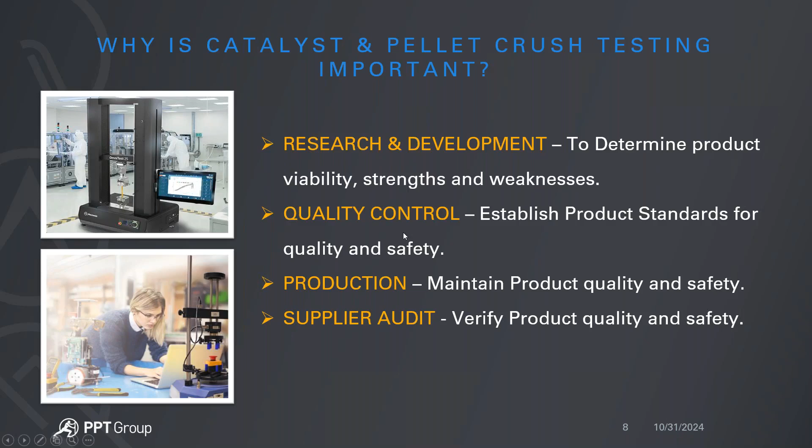All right, so why is catalyst and pellet crush testing important? As with most physical properties testing, for research and development to determine product viability, strengths and weaknesses; for quality control, to establish product standards for quality and safety; for production, maintaining product quality and safety. And then in cases where you're supplied goods and you need to check those goods against supplied values, the testing is used to verify the aforementioned product quality and safety. So these are some of the ways that the testing is used.

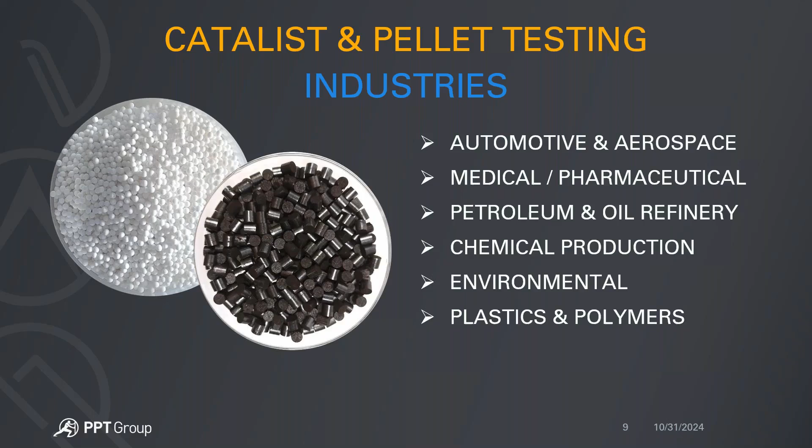There's several different industries that use catalyst and pellet testing: automotive and aerospace, medical and pharmaceutical, petroleum and oil refinery, chemical production, environmental, as well as plastics and polymers. So what is the actual test, what does it involve, and why is it even done to begin with?

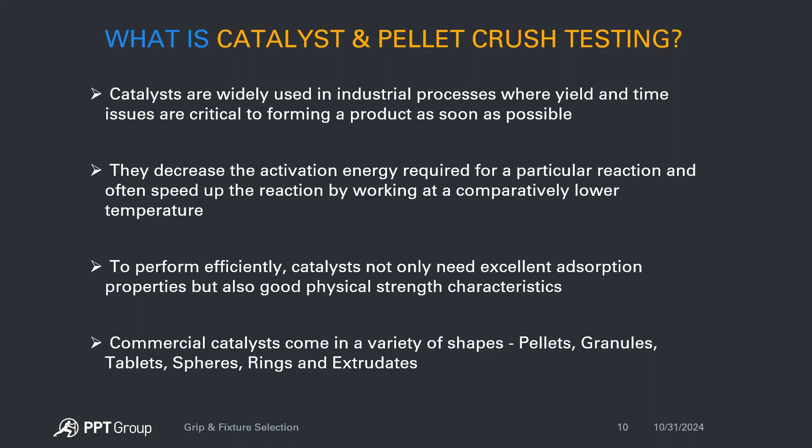Now, catalysts are widely used in industrial processes where yield and time issues are critical to forming a product as soon as possible. They usually decrease the activation energy required for a particular reaction and often speed up the reaction by working at a comparatively lower temperature. And also, to perform efficiently, catalysts not only need to have excellent adsorption properties, but also good physical strength and characteristics. You'll find certain commercial catalysts come in different forms, sizes, and shapes. They'll be either round or cylindrical: pellets, granules, tablets, spheres, rings, and other extrudates.

There are also mechanical failure properties that will cause small fragments and fine particles forming, which essentially creates blockages in fluid flow, especially in the oil and gas, oil refinery and petroleum industries. And this is unacceptable, which essentially will cause pressure to drop across the reactor and create other variations in heat transfer. Again, determining the mechanical strength of solid catalysts is therefore key. It's critical for ensuring a reliable and efficient reaction process.

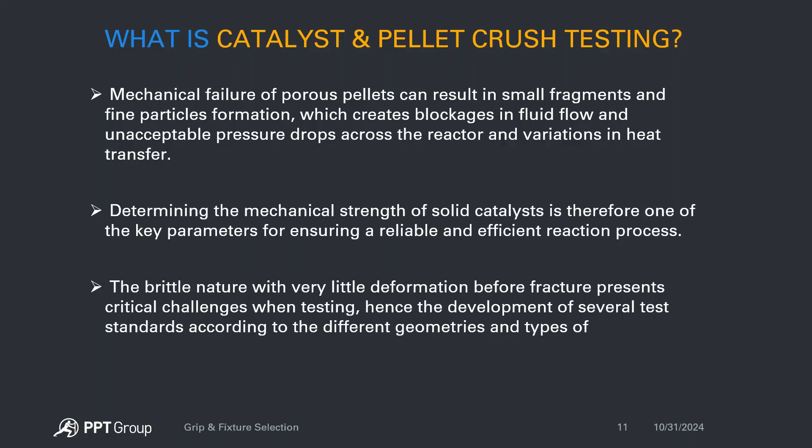Now, because of the brittle nature and the minimal deformation characteristics of most catalysts and pellets, this presents a kind of a critical challenge when testing. For that reason, several different test standards have been developed depending on the type of catalyst or pellet that's being tested to capture, especially, the points of deformation or the point of fracture. That way, whether in research and development or in production environments, we have enough information to go on to make sure that the processes are safe and also that we're meeting our own safety and quality standards.

Now, the primary test applications are, again, single sample testing that you'll find in ASTM D4179. This is where you're testing just a single pellet. And these are usually compressed until fracture or break, either side loading or top loading, depending on what the particular sample or product requires. Again, most testing applications for single pellet testing or catalyst testing will involve running the test at a constant rate, compressing until the sample fails or fractures, and then calculating the break force and the average force.

And then there is bulk crush testing according to ASTM D7084-04. This, similarly, instead of testing the single pellet, you measure and test a bulk in any cup or cylinder or pod that will hold that quantity, and then you bring down either a compression plate or a plunger, and then apply a known force at a constant rate for 30 seconds. And then at the end of the test, we'll calculate the average force and also the energy or the area under the curve.

Now, in practical terms, if you go strictly according to the testing standard, you're also required to dump the tested product out and then sieve it to see how much of it actually failed and how much of it goes through the sieve. So these are the two main tests that you'd encounter in pellet and catalyst testing.

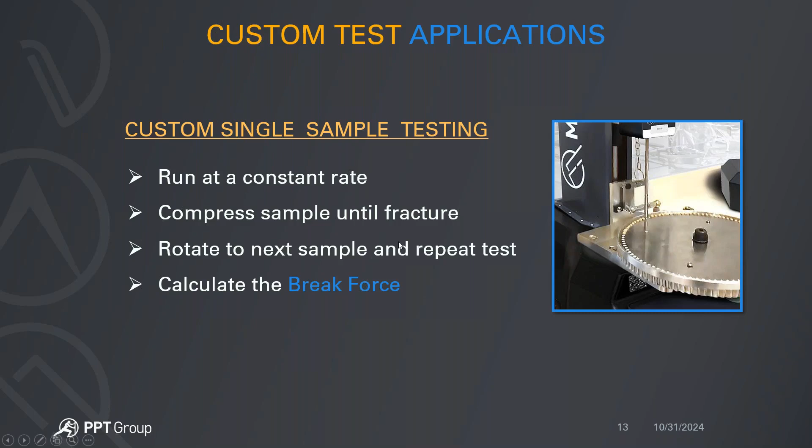So now, choosing the ideal tester. There's several different types of testers. Sometimes, for budgeting purposes or any other challenges, if you're not able to invest in the ideal equipment, there may be handheld force gauges or just simple motorized testers. However, if you're looking to test specifically to either of the two ASTM standards, and there are other ASTM standards that allow you to test pellets and catalysts, there are also inherent calculations that should be included in the test report, which handheld force gauges or simple motorized testers do not afford you the ability to do. And so what we always recommend is the software-driven tester, either a force or materials tester.

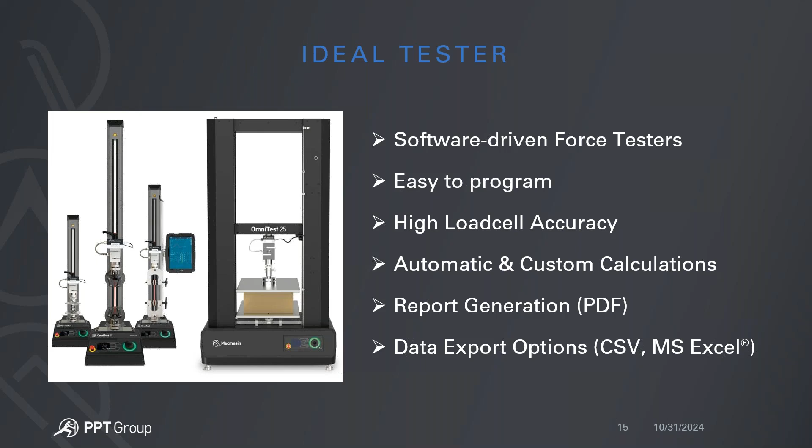One of the reasons is, obviously, it's software-driven. It's easy to program. It has high load cell accuracy and great resolution on the load cell. It also provides you both automatic and custom calculations, which allows you to generate all of the data as required by either testing standard. The system also allows you to generate test reports based on your test results, or in cases where there are additional requirements for data acquisition that the software does not provide, you have data exporting options to export data either to CSV or to Microsoft Excel to input additional calculations using the output data. So what we would recommend is the software-driven tester.

All right, so choosing the ideal fixtures. Obviously, once you select your tester, the next thing is selecting the ideal fixture. And this is usually determined by which testing standard you're actually running to or what your actual testing requirements are.

So if you're testing single pellets, then obviously a simple stainless steel or aluminum compression plate on the top and the bottom is sufficient, as long as the pellet is not rolling around or moving while it's under compressive load. And those plates can be either round or square. And then in certain cases where you have uneven surfaces on your samples, you might choose a self-leveling compression plate over a static one.

Now, one of the requirements here, especially when you're testing multiple batches of samples, the recommendation is to have pods or fixture assemblies that will allow you to empty the tested samples quickly if you need to go to the next step of the test, which is more of a physical test than anything, where you pour the tested samples into a sieve to see how much of it passes through the sieve. And so having fixtures that allow you to easily discard the tested samples is critical to the testing application.

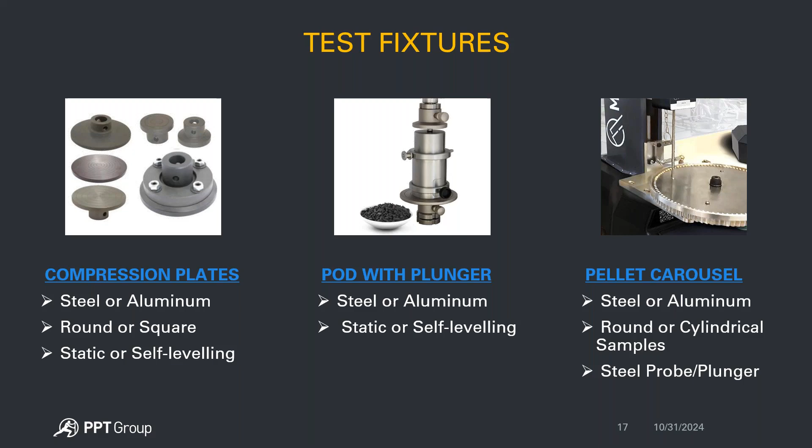And then I did mention the third type of test, which is the custom type of test. And this usually involves having a special fixture, a custom fixture that allows you to move from one sample to another between intervals to perform your crush test to measure break force. So these are the types of fixtures that you usually would find in any testing environment that's subscribing to either single pellet or bulk crush testing.

All right, so without further ado, that's essentially all there is to capture in the overview. Now, the reason this looks a little bit abridged is because we have 3 different applications to go through, and also any one of these testing applications can be its own webinar, and we're condensing them for purposes of time. And we're also hoping that at the end of the presentation, we might actually have some questions.

So, all right, let me share my webcam here and hopefully walk you all through what we are looking at. So the first setup is the rotating base plate, the custom plate that allows you to test multiple samples. But for starters, we're also going to use that to test the single pellet. And then we'll move over to the rotation once we're done with that.

I am also going to share the software screen so we can quickly go over the test configuration. Now, the tests that we've written are loosely based on the testing standard. However, we do capture all of the essential parts of it. Again, for purposes of time and this presentation, we've abridged things a little bit. So all the test is doing here is going to ASTM D4179.

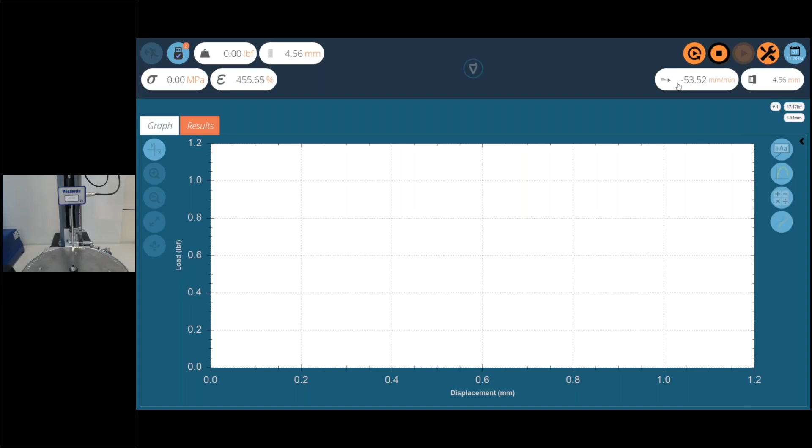So what I'm going to do here is hit start. So the plunger is going to come down, touch the top of the sample, if you can still see my webcam. Once it touches, it's going to proceed to apply 2 pounds per second until the sample breaks, and then it's going to back off. That's end of test. And then all the operator has to do is push home. And that essentially just moved to the next position. But we'll move the tablet along as we see fit.

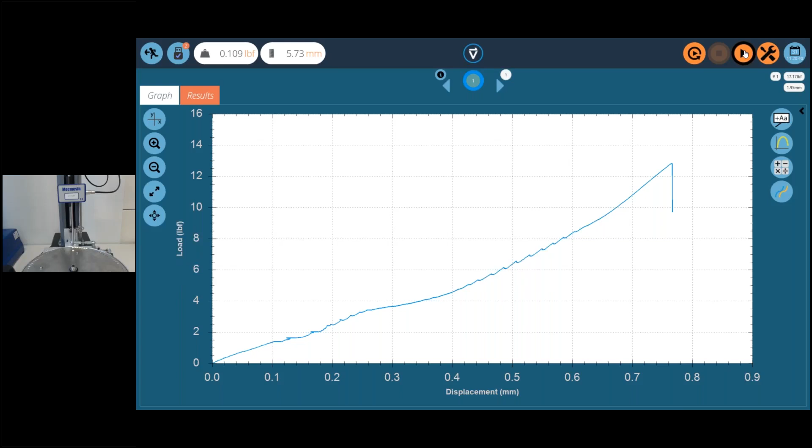But now, just going to drop the second sample in and then push start. It's going to come down, touch, compress, break. Okay, not sure what happened there. So we'll take these two out. Those are effectively broken. We'll put a third one in. Okay, that's our break. And return home.

There we go. So again, this is why you test, kind of an anomaly on test 2. I just tested 3 samples for our demo here. Once the test samples are completed, you can go over to the test results tab, which will essentially tell you pretty much everything you've asked for as far as calculation. So the break force, it's catching that at about 12.8 pounds. So that's where we're seeing that break force for test sample 1.

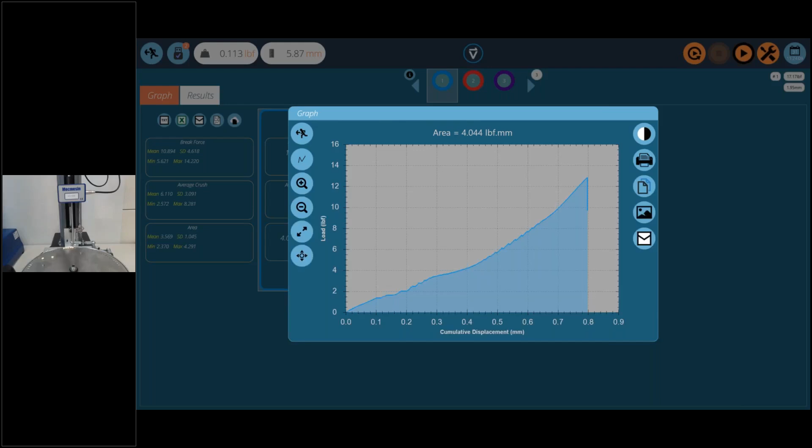So you can set that, say, you know, I need a test run every 1 second or 2 seconds. And once you start a test, the system will prompt the operator for how many total samples they're testing. We currently have 3 samples. So I am going to exit and quickly walk you through

the test procedure. So this is the pellet break test, which is essentially our rotating sample, and walk you through what that looks like. So it's going to be very similar to what we just did, except a few different parameters. Now, there are also additional parameters for certain test standards we've done in the past where they'll say, you need to measure the length of the sample to use that value to calculate additional data and so on. All of that is possible in the software.

Again, as I said, any of these 3 different test applications can be their own 1-hour webinar, but for purposes of time, this is more of an introductory webinar than anything. So in the operations, as you can see here, it's a very simple test. So this time, instead of using a load rate where we ran at the previous 2 pounds per second, this time we're running to a break at 10 millimeters per minute.

So we're going to come down, touch on, and then run until a break condition is detected. At that point, the probe will retract, and then the plate will spin to the next position or the next sample, come down, do that. And then on the bottom right, we've turned on the automation, and we're asking it to repeat that every 2 seconds. So let me just reduce that to every 1 second, so we're not sitting here waiting and waiting.

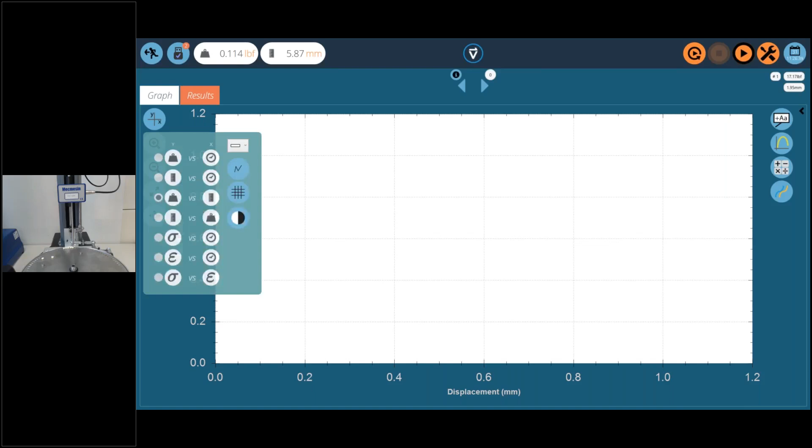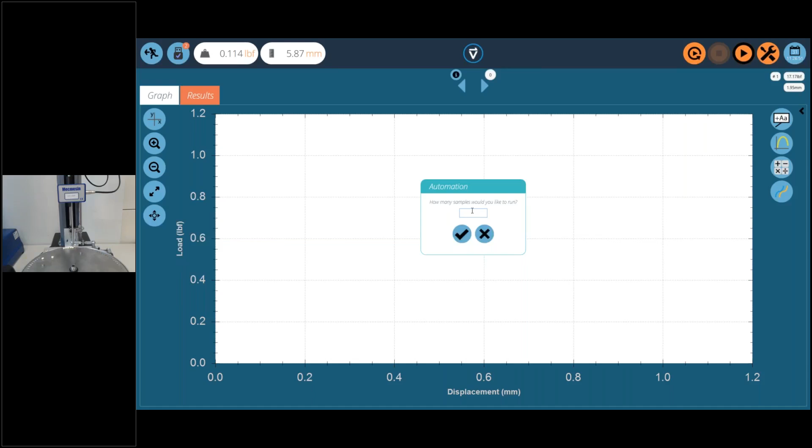And again, change the contrast just a little bit so we see the traces better. Let me click that one more time. There we go. So at this point, we hit start. The system will ask how many samples we would like to run, because we've already activated the automation. So we'll say I need to run a total of 5 samples, go. So now it's going to come down, touch the top, run to a break, and then automatically move to the next position.

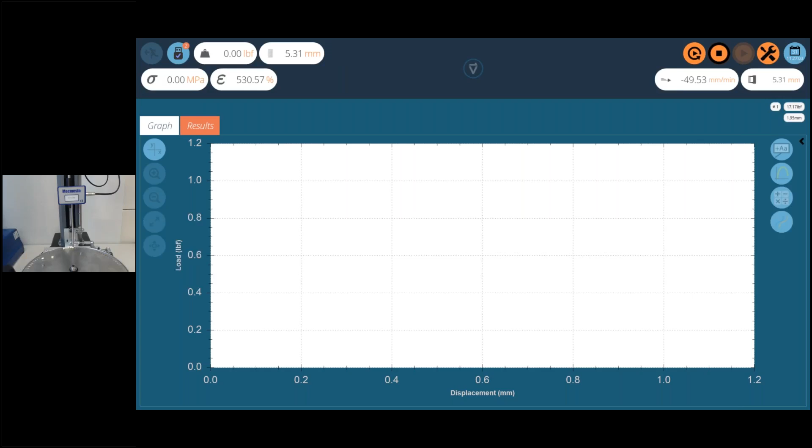So next position. Okay, so it's coming down. That's our break. Next position. 1 second, come down.

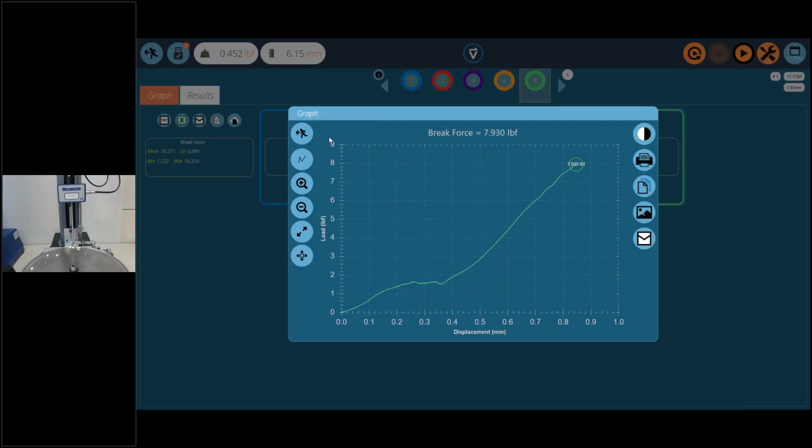Test 4, it's about 12 pounds. And something else happened here as well. Now, usually when we do these demos, I don't want any of these values to be written in stone. It's more of a proof of concept than anything.

In an ideal world, if you wanted to see exactly what the values are, these are some of the times that we could arrange a virtual demo where you would send us samples, we would match them up with the appropriate fixtures, and then we would do that, and you'd see some data that you can actually analyze. But everything we're doing here is just a proof of concept to just show you how these applications are done.

So again, these samples can be spherical, they can be cylindrical, and I've actually tested samples where they wanted you to stand the sample up. So those are instances where we would have to change the different notches on the plate to make sure they accommodate that as well. But the plate itself is designed to move to the next position as soon as each test is completed. And this can be repeated for the ASTM D4179 as well, where it uses the load rate.

So the next test is the bulk crush test. And if you give me a second, I'm just going to move my camera over to the setup. So this is essentially the setup we have. I do have some catalyst that we can use. And one of the things we will discuss in establishing a consistent and repeatable testing environment is being able to measure appropriately the same sample size for each test.

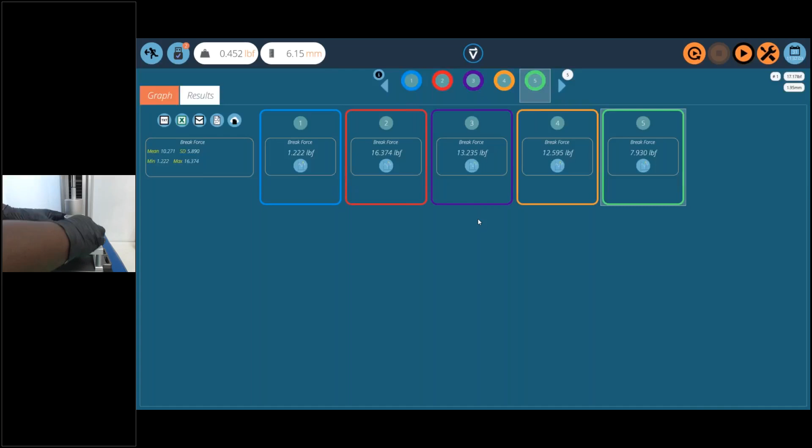I did also mention the ease of removing and discarding samples. So that obviously does come off. We're just going to take a sample size here and we'll fill that. So that's our sample size. And we'll go ahead, place the sample.

And then I also wanted to show you what the test report looks like on these tests that we just did. So if you go to report, it should pop up here in just a second. So it will show you pellet break test report. It will have which user was logged in at the time of the testing. It will give you the values, and then it will give you a graph. And then there is an inbuilt PDF driver that allows you to create a PDF test report here.

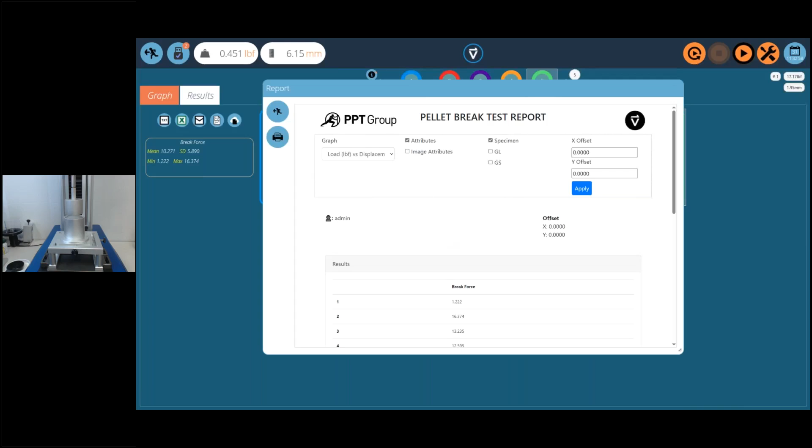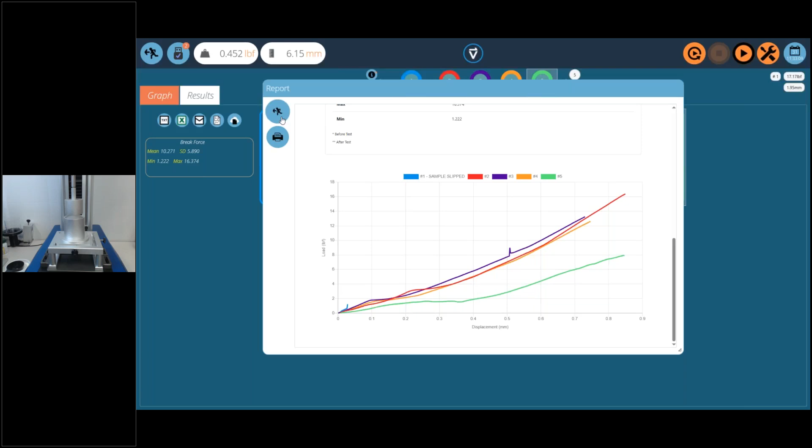So as you notice here, sample one didn't yield any test results at all. There are additional annotations that you can include. For sample one we'll just say sample slipped, for example. Right, so that's now included when you generate your test reports. That way, anybody looking at the test report will go, okay, what happened to sample one? You can tell from this as sample one, which is that blue trace, the sample slipped, and that probably would account for why it looks the way it does, a little bit different from the other sample. So that's what the report generation does.

As you can see here, you can use the TXT feature to export to a CSV, or you can directly export to Excel, or you can email this to any number of recipients, or you can send it in the cloud if you have partners in a different country in the world and they would like to see the test results. You could use that feature as well. All right.

Next is the ASTM D7084 test. Again, just to quickly go over what the test configuration looks like. In our operations, again, very similar. However, this does call for 10 pounds per second, and then you're going to hold it for 30 seconds. Now, products like catalyst under hold have a really interesting reaction when the motor or the crosshead holds that for 30 seconds. So we'll look at that. We'll test just the one sample just so you all see what that test looks like. And then in the test result, we're looking for the maximum force and the area.

Now, one of the more important parts of this test is where the sample is dumped into a sieve, and then the operator has to sieve that to see how much of it failed. Is it just 10% of it that failed? Is it 20% of it? And what actually meets your own internal pass or fail or acceptable quality requirements and so on. So that's essentially what that test looks like. So I'm going to go over and we'll run a test to see what that looks like.

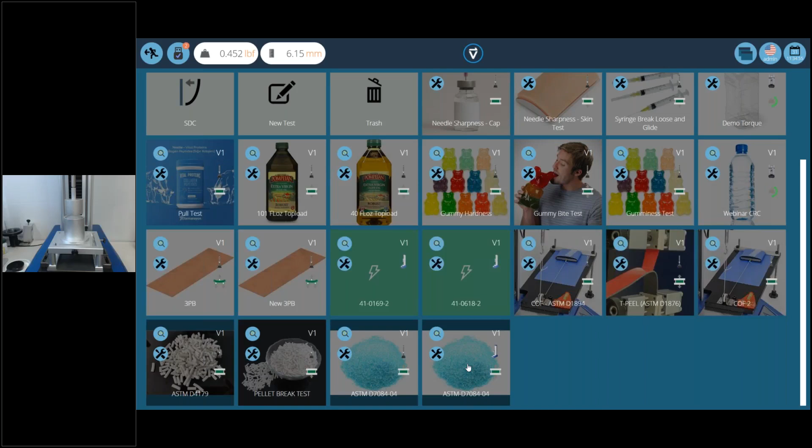So here we go. Start that. So we're going to set our home position first. That way the plunger knows to return to that home position, because on that previous test, as you can see, there's a different setup. Now, that's also one of the advantages with the testing software, is we're able to accommodate two different testers using the same software and just call them up as we need them. So at this point, we'll go ahead and start the test. So the plunger is going to come down, touch the surface, continue to compress, maintain 10 pounds per second for 30 seconds, and then it's going to retract.

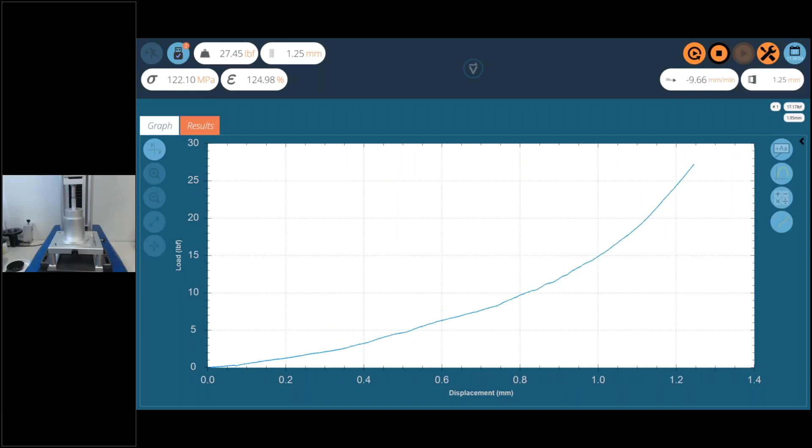So that's our 30-second hold. And that's our test. It's a pretty cool little test. So in the test results, even though we're calling this break force, we should really call it just maximum force more than anything. Okay, here we go. Just call this max.